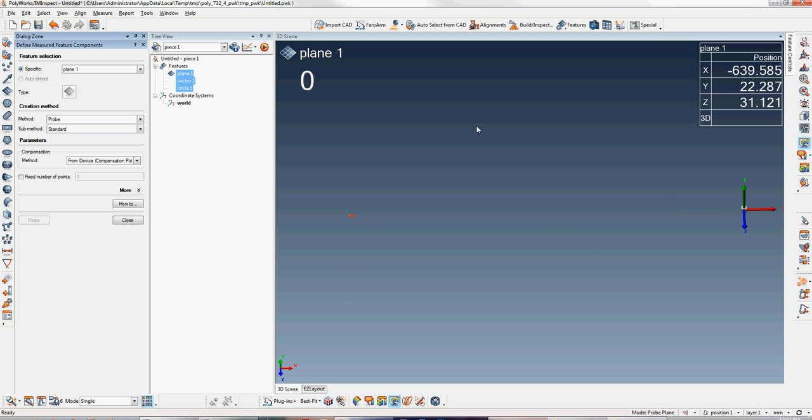A series of green button clicks on the surface, pull away from the surface, hit the red button, gives us a confirmation opportunity here where we can see the flatness is 13 microns, we're in metric. We'll hit the green button to confirm.

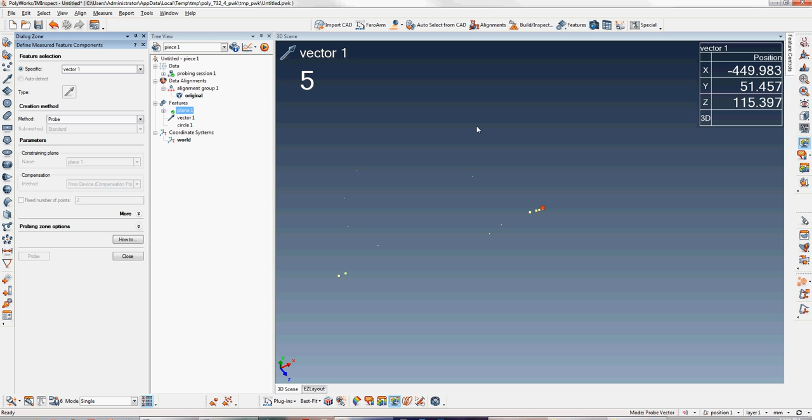And then we'll go ahead and probe a vector, and again confirm, and then we'll probe a circle. These 2D features, click all of those, pull to the middle, hit the red button, and say confirm.

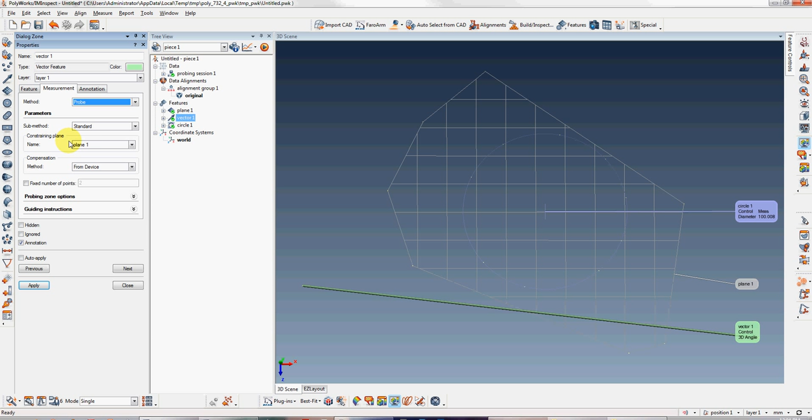It's important to note that these 2D features, as I started saying a moment ago, utilize what is known as a plane of constraint. So if we click on vector 1, we can see that the constraining plane was plane 1, as we would expect and want. It's important, I guess, to say here that you should work in planar groups.

So now we need to establish a coordinate system or an alignment. Typically when not using CAD, I just do a coordinate system. So now let's say, okay, primary feature for alignment of this coordinate system will be the plane. I want it to sit on the plane first and foremost.

Within that plane, we'll clock it to vector 1, paying attention to the vector's direction based on the way I probed the first 2 points when I probed that line, and then the circle. And then what we can do is actually specify the circle before the vector and have it lock in as such.

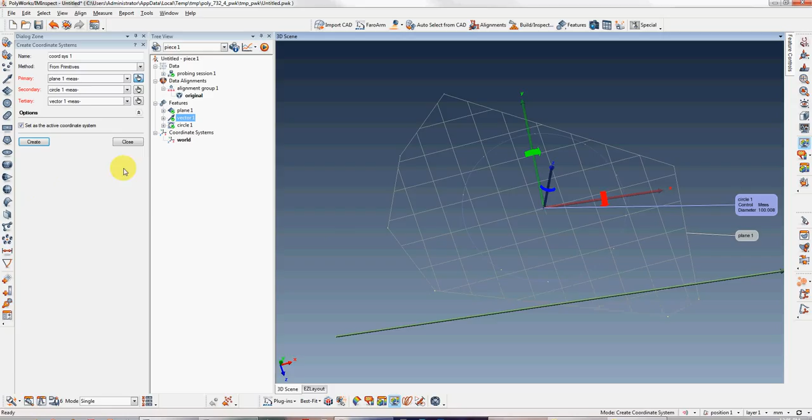And then if we want to change the assignment of the directions and or XYZ, we can click on these little arrows to kind of rotate things around. Once we have it the way we want, we're going to say create, and we can allow it to set it as active if we want.

Then we'll close, and we see that now the world has gone gray. This one has gone colorful, indicating that it is active and current. And if we look at a feature like circle 1, we can see that the X, Y, and Z values are exactly perfect as we would expect, because that's the way that we set up the coordinate system.

Okay, so now that we have that coordinate system, we'll continue through with our workflow. Once again, we're going to say circles. I may want to change the name of this initial circle here to be origin circle.

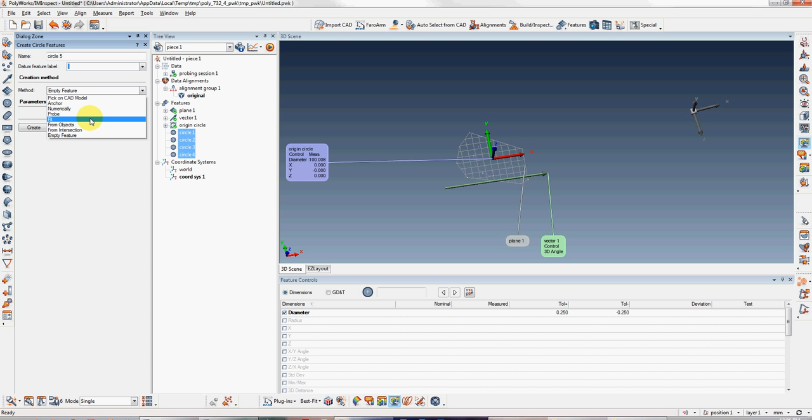So now I can do, let's say, 4 more circles like this. Highlight these 4 circles and then construct the bolt circle that runs through them all. And we would do that by saying circle 5 will be from object's center point, and we might call this the bolt circle.

And we'll hit create. At this point we get a red chain link indicating that it's a dependent feature and actually not one that we would measure. We'll highlight these and then say probe measure.

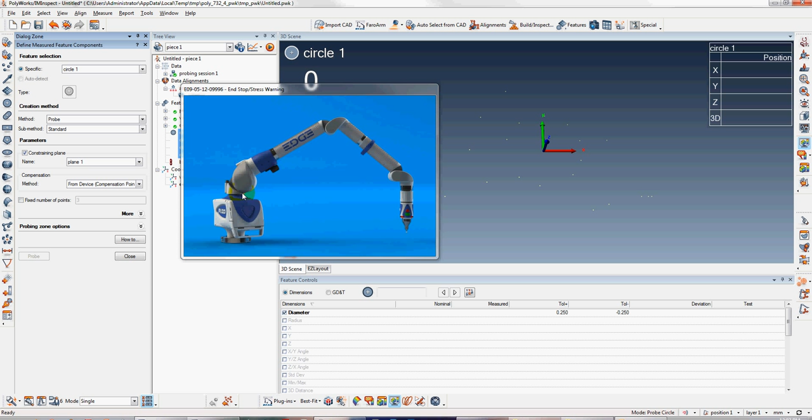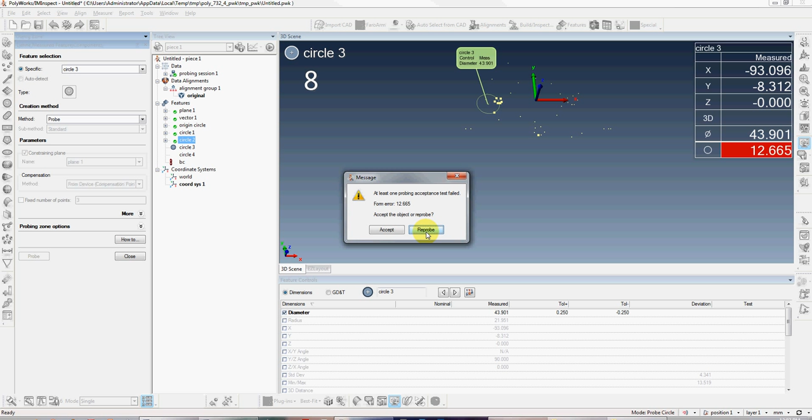If I take a reading that ends up being a bad reading and I click the red button to accept it, it throws the form out and it's going to warn me here. I can use the green button to toggle between these, and hold down the green button on reprobe to initiate a remeasurement, in this case, of circle 3.

If, like I just did on point 7, I know I took a bad reading, or maybe even two, I can hold down the red button and it'll slowly pull back readings, and then I can continue onward and get a good result.

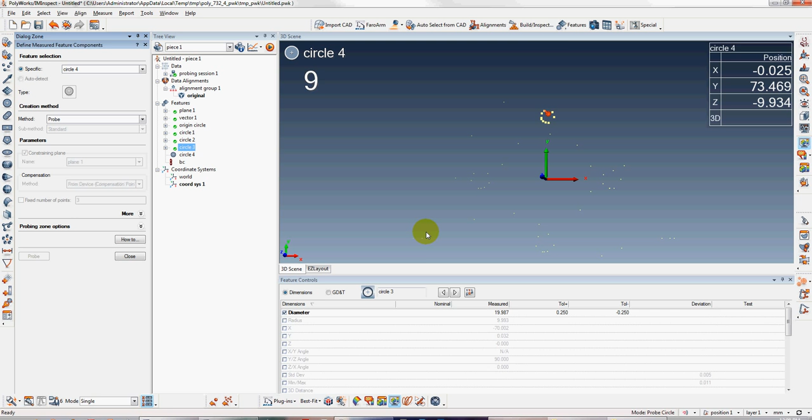Then from there, now that I've satisfied all of the readings for these 4 circles, they're all measured, showing a green check mark. And the bolt circle is showing a green check mark as well now, because it was able to calculate.

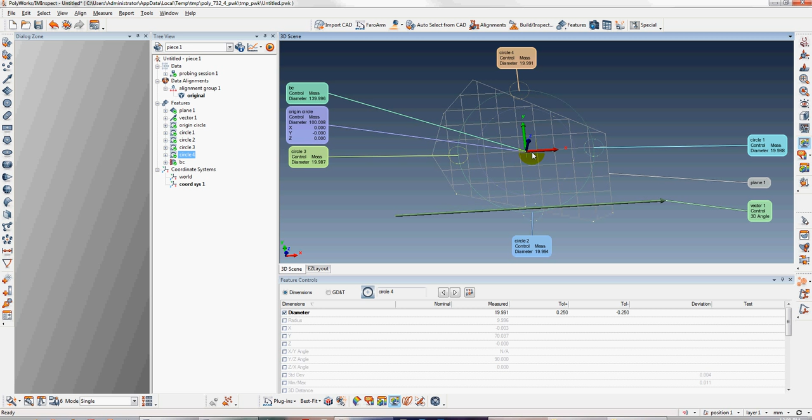So all I need to do now is potentially go in and type in some values for these circles. I can highlight these circles. Diameter should be 70 for all of them. And you see that, excuse me, the diameter is 20. And then maybe we want to turn on the XY location as well.

I won't bother typing in all those values, for the purposes of this example. I think you get the idea here. This guy is 140. If I wanted to do some GD&T, I could specify my datum, so I could go to plane 1 here.

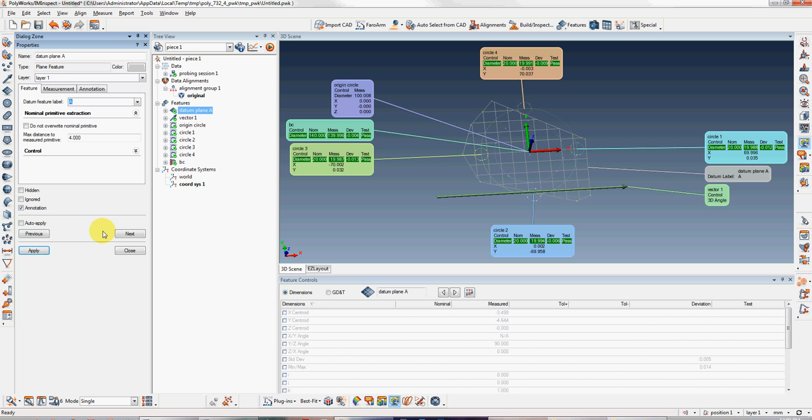And go to its properties and apply that. And then maybe vector 1 is actually datum B. I could apply that. And then maybe my center circle is actually datum C, and I could apply that.

Now I could go to these 4 individual circles, and instead of looking at the dimensions, I can switch over to GD&T and say add, and transpose the control frame right from the print, whatever it might say. So A, then B, then C. And because C is a circle, I could even have bonus tolerance on that if I wanted to.

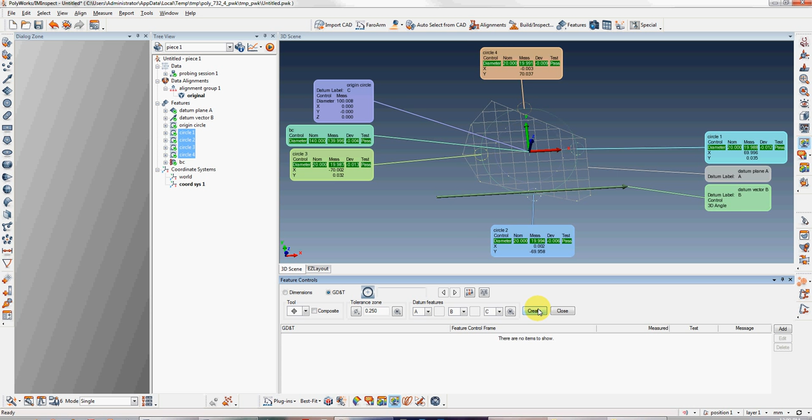And hit create. You see it calculates all the necessary information, including the mating diameter, which, you know, the mating diameter on all these guys really needs to be 20, so we can edit that as well. You see it's looking pretty good.

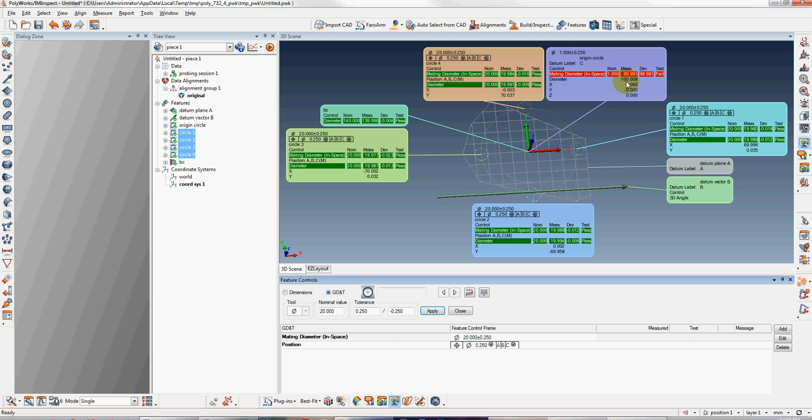Adjust the mating diameter on that circle. And lastly, let's do a basic dimension.

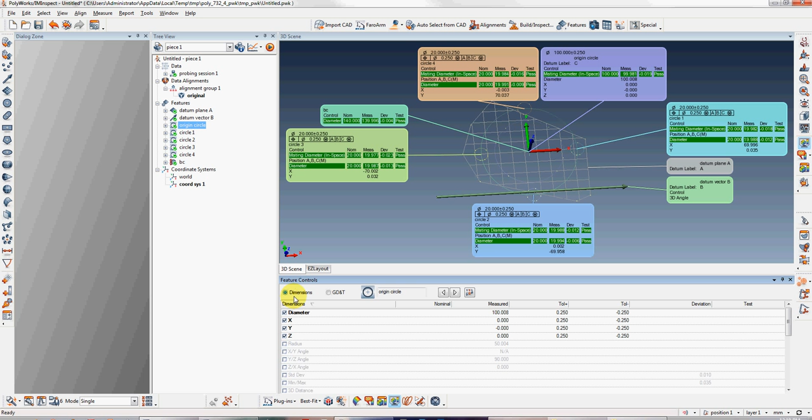We can jump back into the dimensions toggle here on this radio button, and then perhaps we select circle 1 to 3, which will be from here to here. We could do a dimension. So we'll say, hey, we want a dimension. By having those pre-selected, it knows it should be them, adds it, establishes the 3D distance, and we can type in the value here.

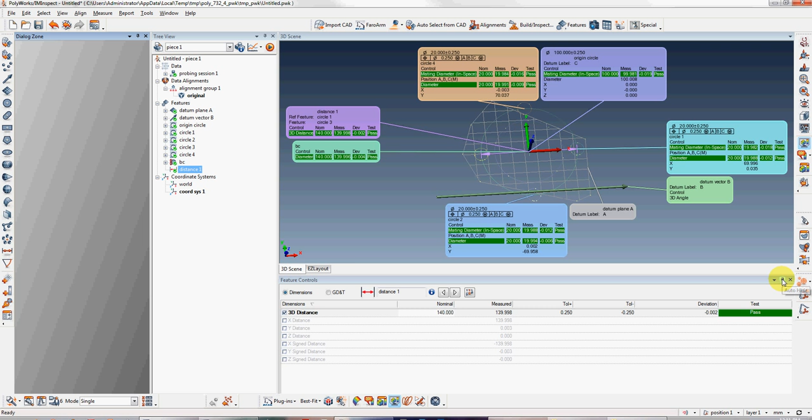And if we want, we can turn on the componentized properties as well. The last thing that might remain is to get some things put into a report. So as we go through from the different view orientations, it's good to build the report as we go.

There are 2 components for a report. There's either a screen capture of the canvas or a chart of the highlighted features. For that purpose, I'll just highlight all of the features. Let's say the origin circle through the distance. And we'll say give me a chart there.

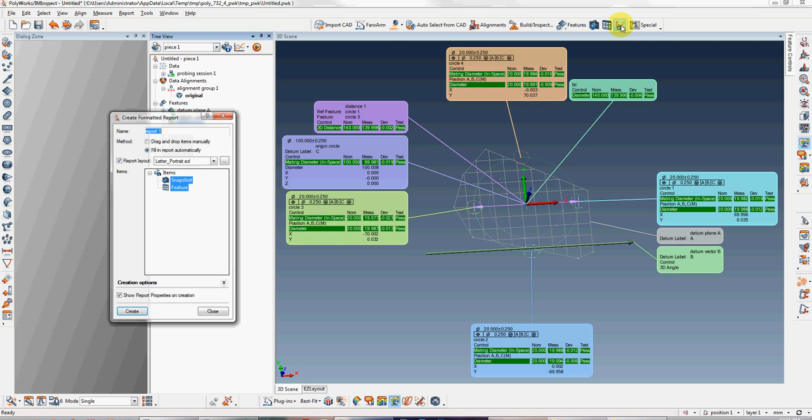And as we're building those in here, they're dependent features, and we can say, hey, lay that out in the report for me automatically, and it lays it out. Those things that have been nominal and toleranced show up in green or red notation, and those things that are not yet nominal, because we have to type that in, are showing up white. And then here.

So that concludes the no-CAD probing workflow.